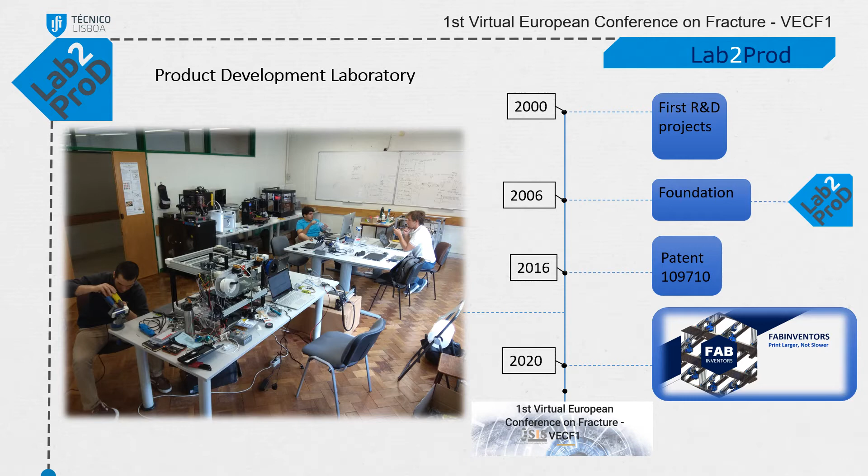The work that laid ground for this study is associated with the 2016 patent, and this year we are trying to evolve that patent into a startup, Fab Inventors. Briefly, both this patent and study deal with the specific manufacturing process, material extrusion, better known for some as fused filament fabrication or fused deposition modeling. In this manufacturing process, heated feedstock plastic filament passes through a nozzle tip and is then deposited into a build platform, creating tailored structures layer by layer.

Material properties can vary widely, and parts are often considered to be anisotropic. Among the multiple process parameters that can influence components' behavior, we can name build orientation, layer height, and temperatures involved. The motivation for this study comes, broadly speaking, from the potential of these additive processes as disruptive technologies that can transform industries, shorten product development steps, and considerably reduce components' time to market.

Adding to this, a slightly different source of motivation arises with the specificity of works developed at Lab2Prod. Namely, in the figure on the right, there's a picture from 2017 of my master thesis, a dedicated material extrusion apparatus. The apparatus consists of two independent extrusion modules that allow a parallel and collaborative fabrication of parts. To control it, a dedicated slicer software that avoids collisions between modules is used to generate the G-code file. This software slices the model into layers and in each layer allocates a percentage of the area to be produced by each module.

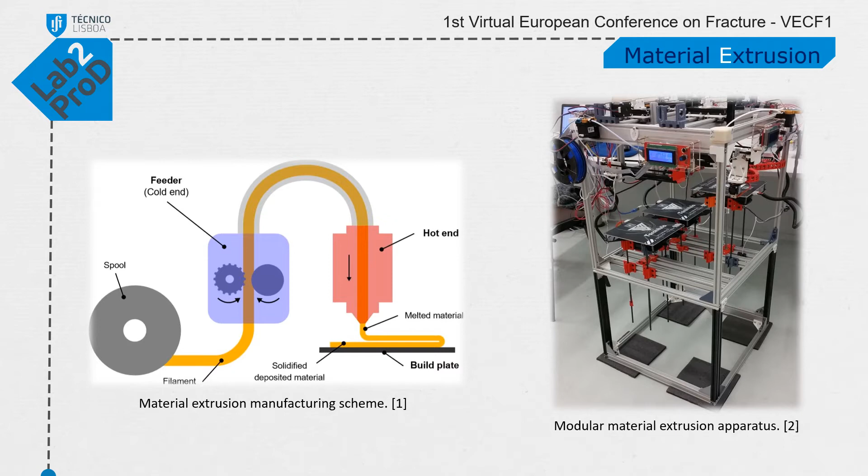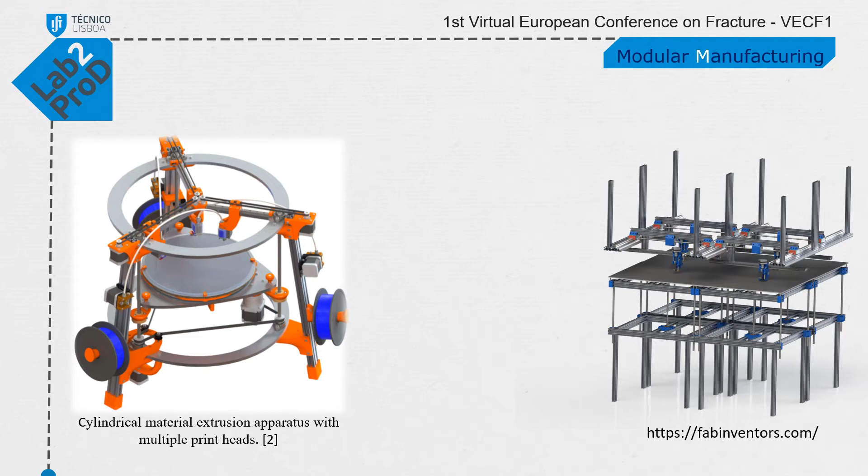Since 2017, numerous iterations, machine versions, and tests were performed. The left figure displays a new multiple extrusion apparatus that was developed by the research team, and on the right we can see a render of the most up-to-date version of the machine used for this study. Recently, the project has even received some attention from the Portuguese media.

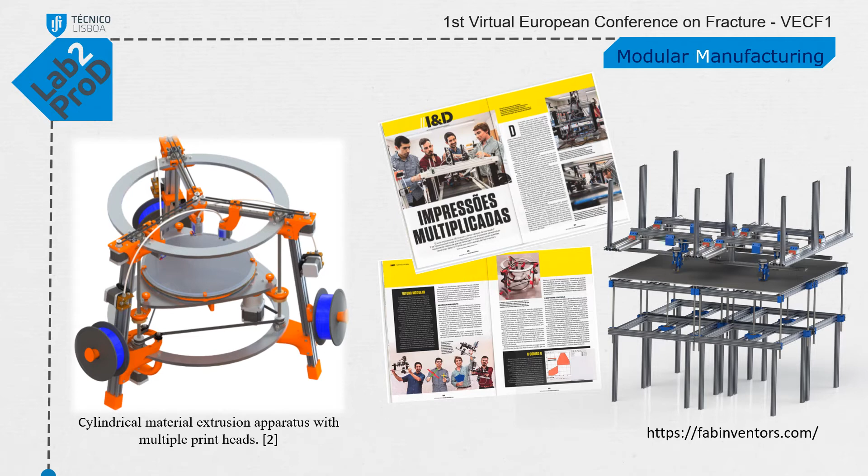The manufacturing of parts through multiple independent and collaborative extrusion modules emerges as a potential solution to overcome the limitations of speed, cost, and scalability of the established AM processes. By allowing a collaborative manufacturing between extrusion modules, the size of build parts can increase without compromising production time and maintaining geometrical accuracy. The existence of multiple independent extrusion modules imposes the existence of intersection areas in parts, and these intersections can be better understood as seams.

In this work, authors take advantage of the dedicated manufacturing apparatus and slicer software to evaluate the influence of seams in the mechanical properties of PLA dog bone type samples produced with two independent extrusion modules.

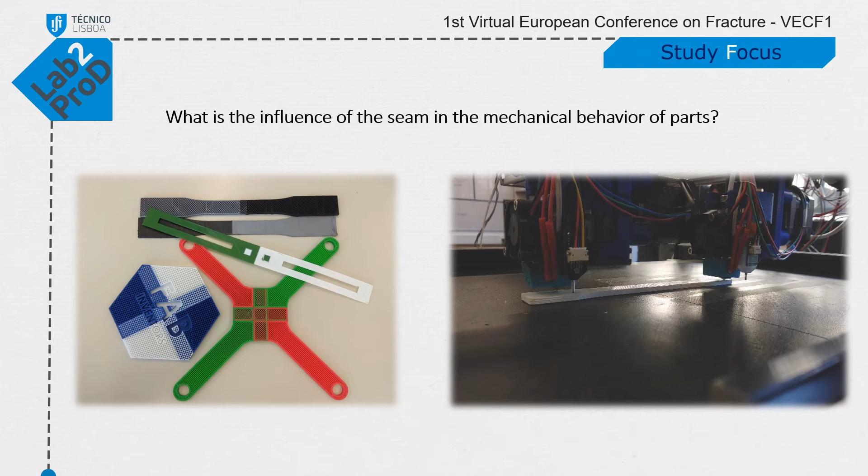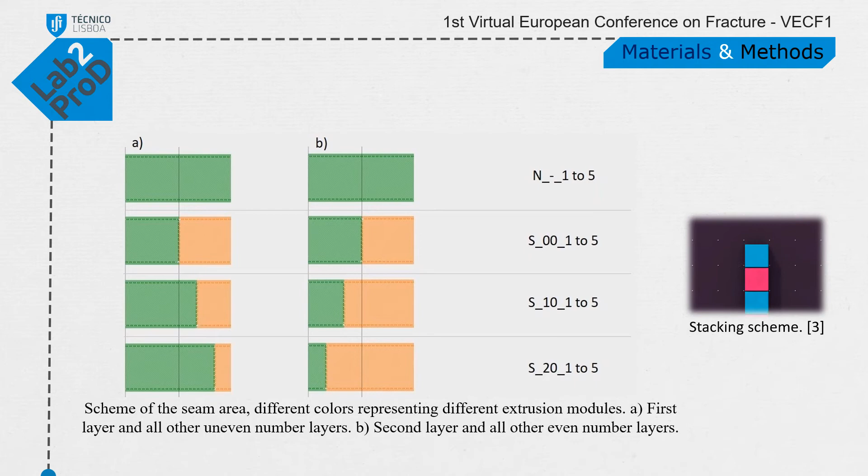All specimens are produced with a raster angle of 45/-45 degrees, a layer height of 0.2 mm, a nozzle 0.4 mm in diameter, and at 205 degrees of extrusion temperature. The material chosen for the study was PLA, polylactic acid.

It is a semi-biodegradable thermoplastic polymer, and one could argue it is the most used filament for this type of material extrusion. Two spools of white PLA filament were used in this study. The spools have a consecutive manufacturing lot number, and their filament diameter is 1.75.

The standard test method used follows the specifications from the standard ASTM D638-14. The tests were performed on a universal testing machine with a 10 kN load cell and a crosshead speed of 2 mm per minute.

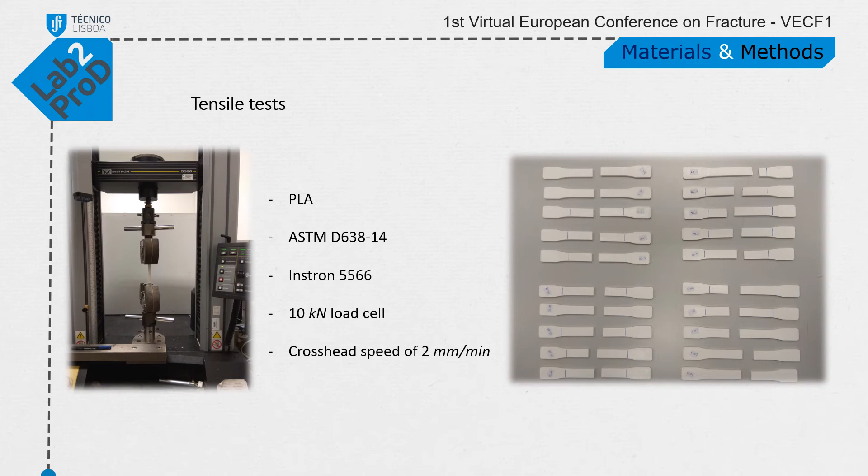Here we show two broken specimens after the tensile test. From the fractured surface, it is possible to observe that specimens with seams display a smoother surface than specimens without them, and that the fracture location is always in one of the ends of the seam when there is one.

Samples manufactured without a seam continued to sustain the applied load, undergoing plasticity, denoting the tearing of the extruded paths, while in samples with seam, rupture of the specimen is coincident with the elastic limit of the material, the surface is uniform, and separation of paths that were deposited with different printheads seems to be present.

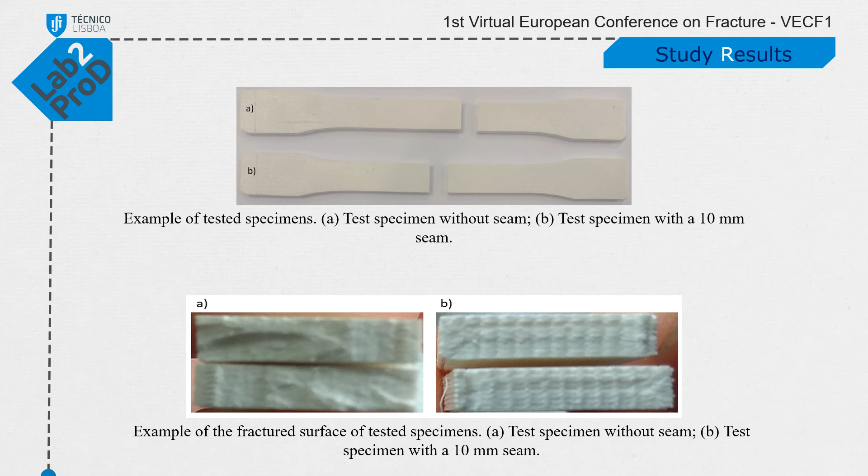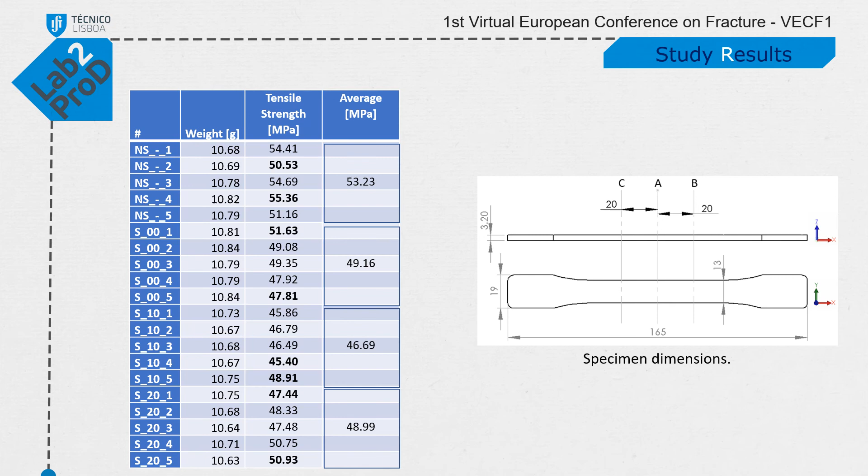Concluding, the results suggest that in material extrusion, seams act in a part by creating a localized fragility, diminishing its properties. The maximum stress achieved in the specimens with seams is coincident with the elastic limit of the material. Accordingly, seams could be considered in the design stage of a product since their location and placement can act as a mechanical fuse.

The results lay ground for further studies on the subject, which can be focused on seam properties, geometry, and toolpath planning. We would like to underline one of the few works on the subject, which is Washmut's Considerations for Toolpath for Multiple Independent Extrusion Heads.

Therefore, authors assume that the development of multiple extrusion manufacturing with the goal of reducing large part manufacturing time without compromising geometrical accuracy is worthy of studying. Current developments are studying the application of a thermal process in the seam area to promote material coalescence.